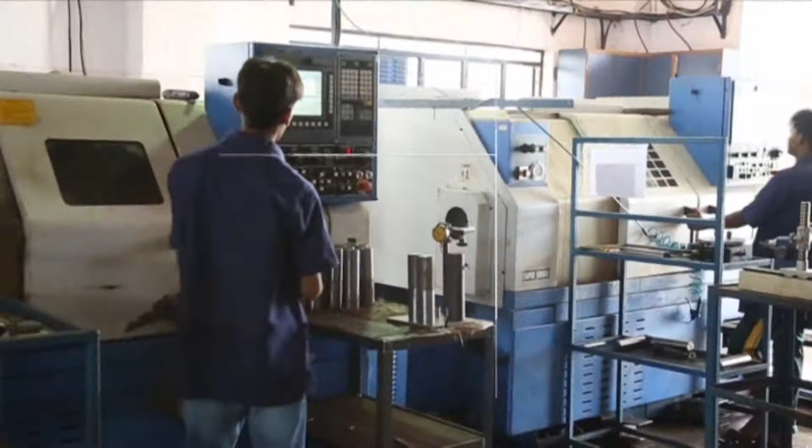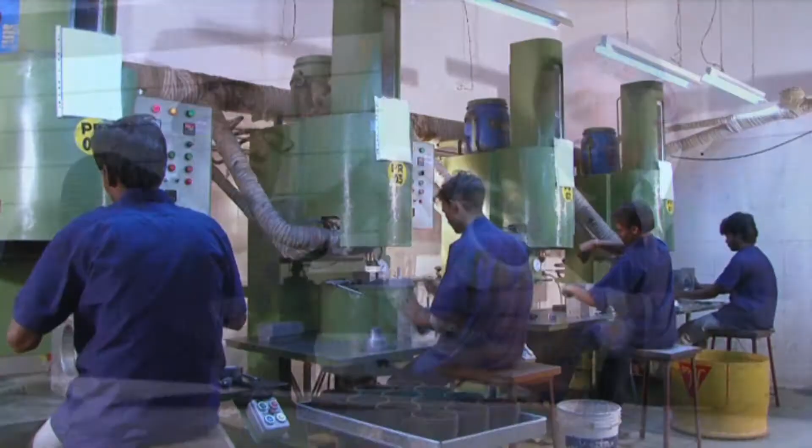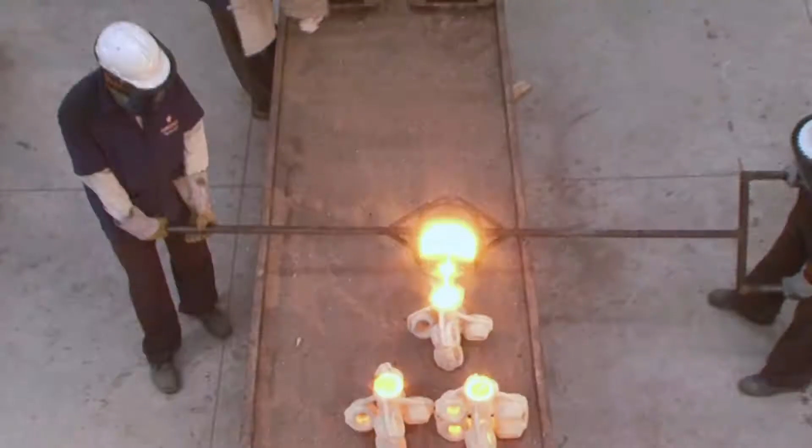The famous company, manufacturers of precision investment casting by lost wax process. Marshall Technocast is a state-of-the-art investment casting production house from India. Located at Rajkot, Gujarat, soon emerging as a vital center for investment casting, it has core advantages of expertise, experience and enthusiasm to deliver high-quality cast components to the thriving world of manufacturers.

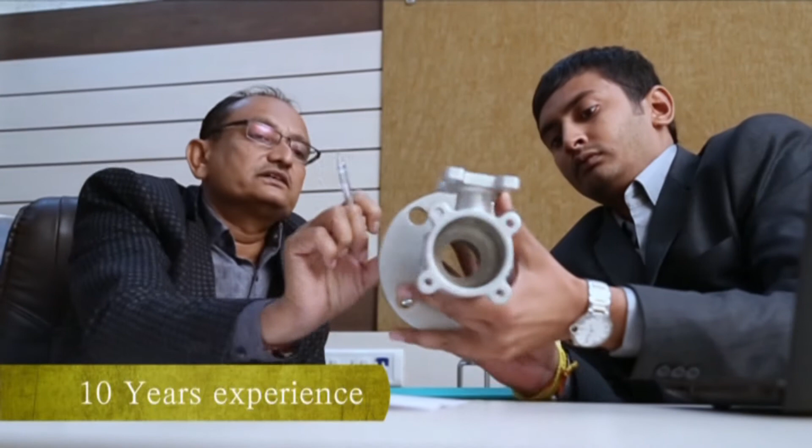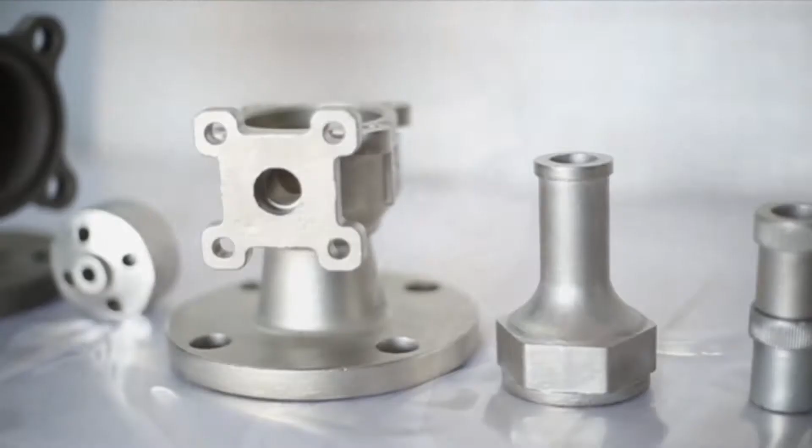So, let me introduce the whole procedure of the company.

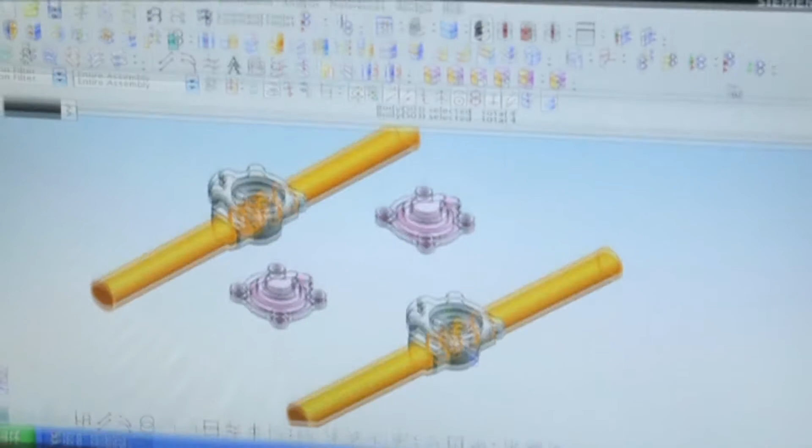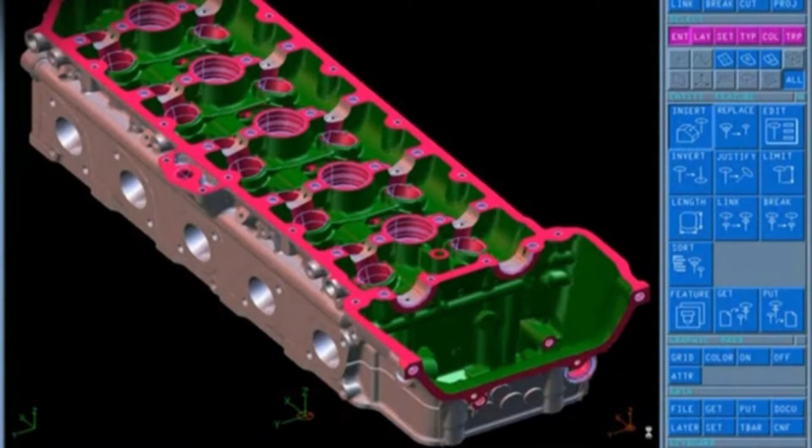Design and simulation. Designed to make it right the first time with collaborative engineering. MTPL helps customers in premature designing stages for building their products, using the concept of design for manufacturing to make it right the first time. MTPL offers in-house facility for 3D modeling and 2D CAD drawing using latest CAD software. We can also work with IGS, STEP, UG files from customers, supplied 3D models in various forms like Parasolid, IGES, STEP, UG files.

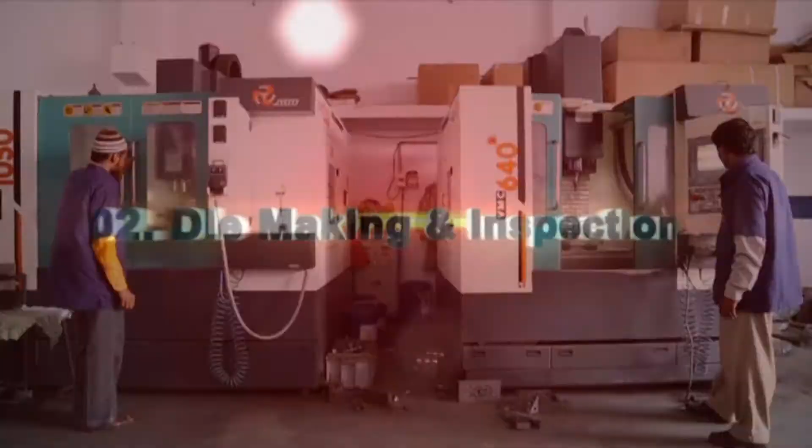Die making and inspection. We have all the facility and experience for die making on VMC, MC for any kind of critical components, and we are also doing 100% die dimension inspection as per drawing before sampling.

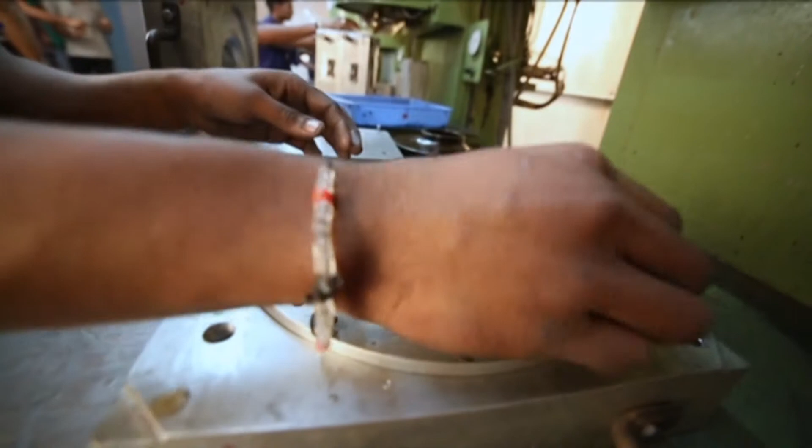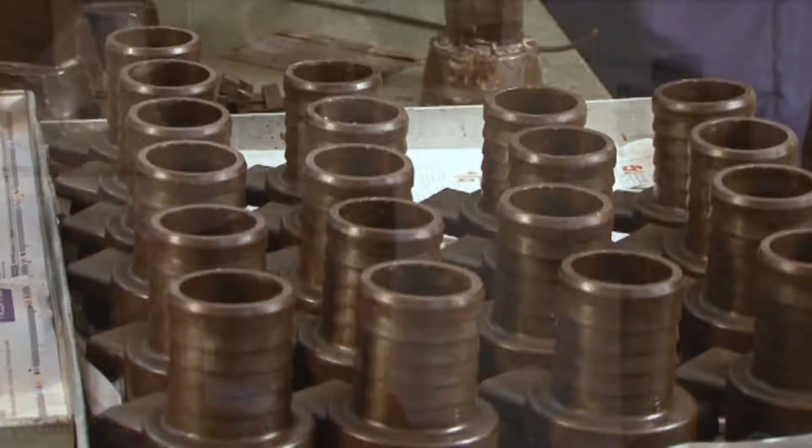Wax pattern injection and assembly. Final casting quality is a mirror of the wax pattern quality. We use imported pattern wax and soluble wax for accurate pattern making. Assembly design is done to produce best yield with best quality. We have 5 semi-automatic wax injection presses with vertical injection and runner bar extrusion press.

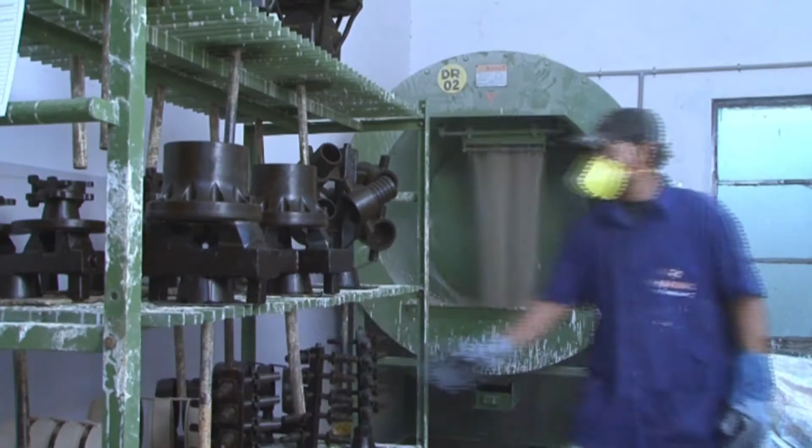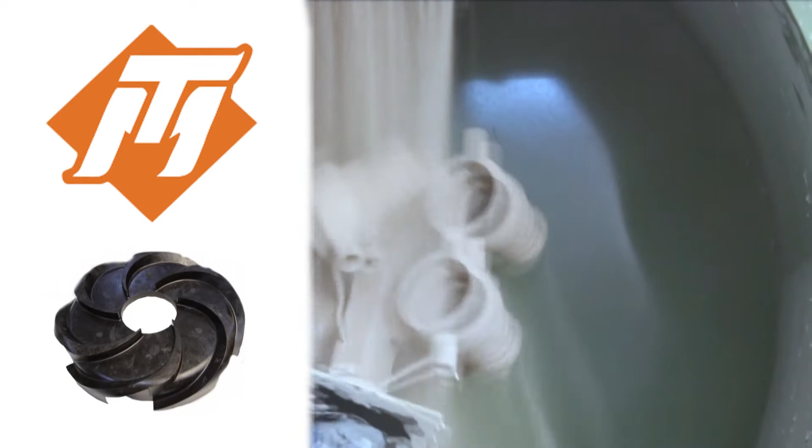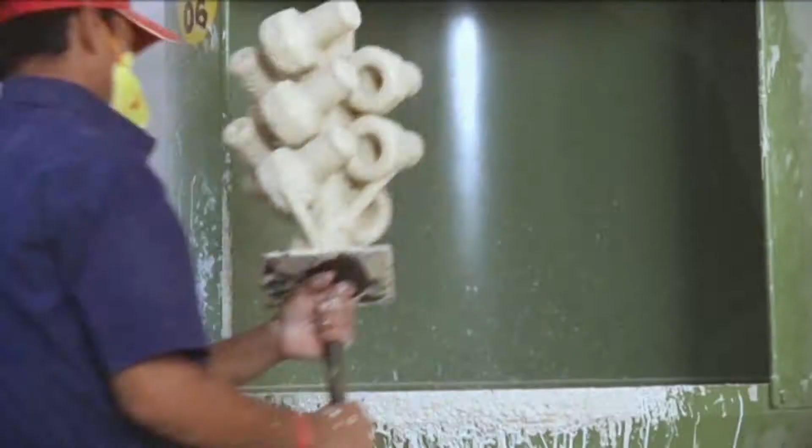Shelling. The wax assembly is coated with a ceramic shell by repeated dipping in ceramic slurries and alternating in dry beds of sand and clays. Heavy or thin sections are features of any part. Additional coating gives added strength to the shell, thus eliminating bulging or distortion of the casting. At this stage, the ceramic shell is heated under gas-operated dewax and the wax is removed by melting, leaving a hollow shell. The most crucial stage of the shelling process is the primary coating, where very fine grade of sand is used. This results in a casting with excellent reproduction detail and the designated surface finish.

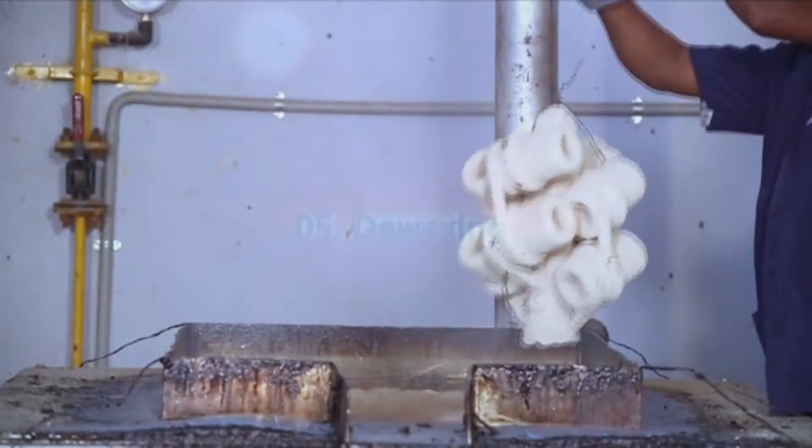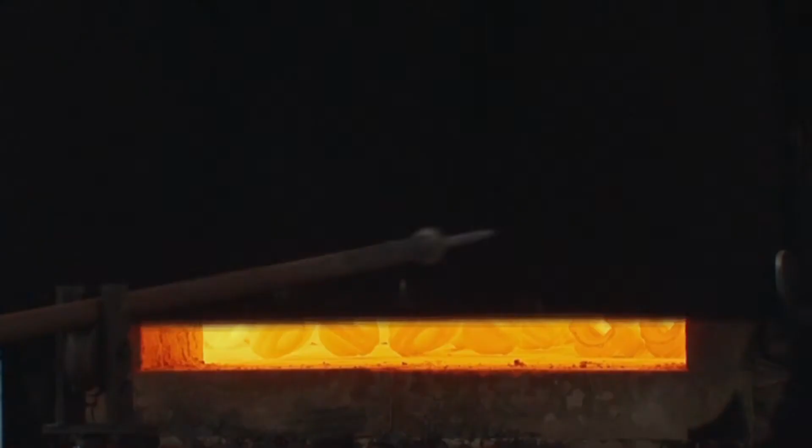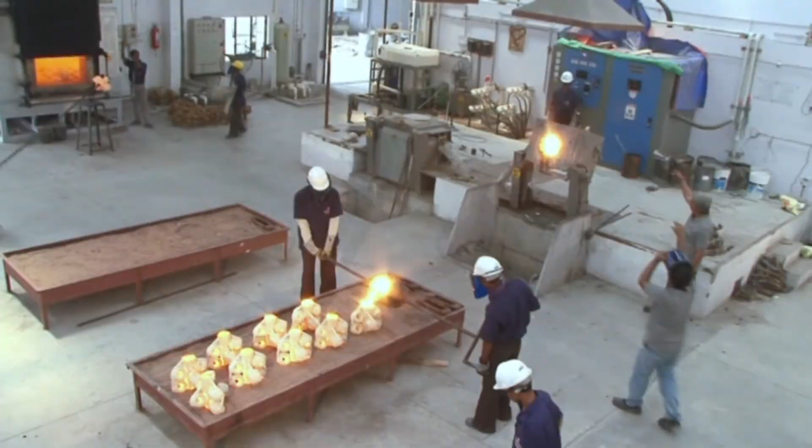Melting. The next process is the most important one. The melting process is the part which impresses the image of the investment casting product. The quality of the product depends on the melting process. That's why our melting shop is equipped with Inductotherm make induction furnace with 300 and 150 kg crucibles and temperature controlled shell baking furnace. We use standard and best quality scrap to ensure best metallurgical quality of investment casting products.

Abrasive cutting machines.

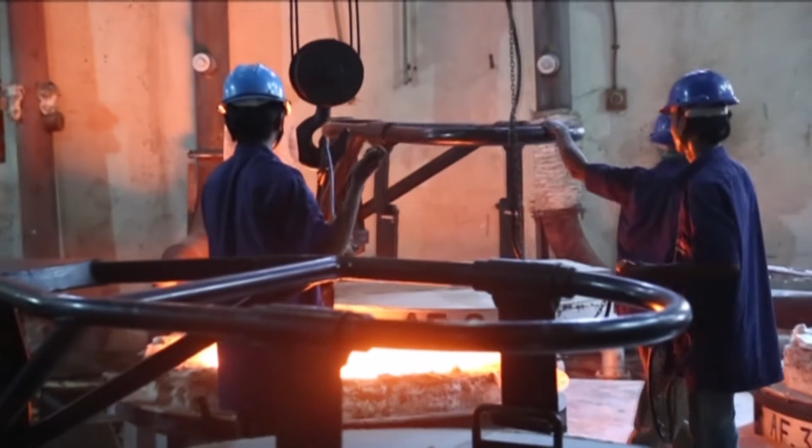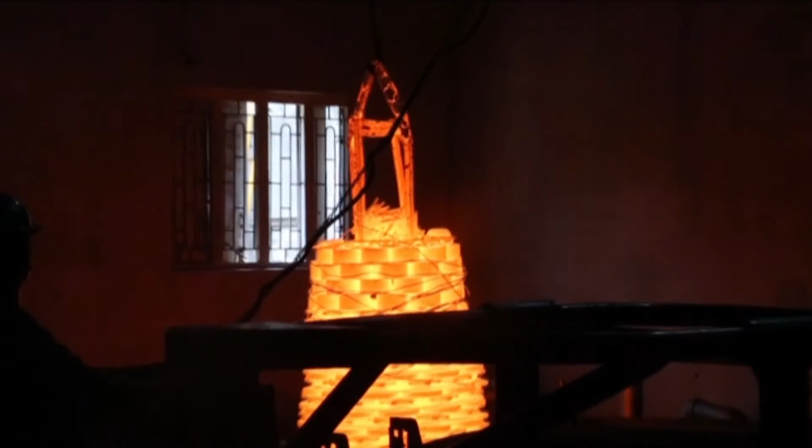Heat treatment to ensure desired material properties. We are doing heat treatment like solution annealing, normalizing, tempering with temperature controlled electric heat treatment furnace, along with special requirements of customers. Best heat treatment practices are ensured by the microstructure study after heat treatment.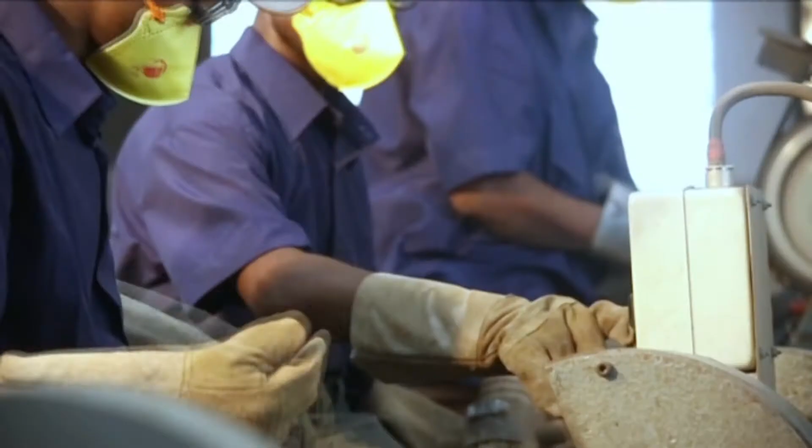Fettling. Our fettling shop is equipped with shot and sand blasting machines, belt grinders, and other machineries necessary for the fettling. We are also doing electroplating and other plating and coating as per requirements. We supply the casting without any gate and riser pads.

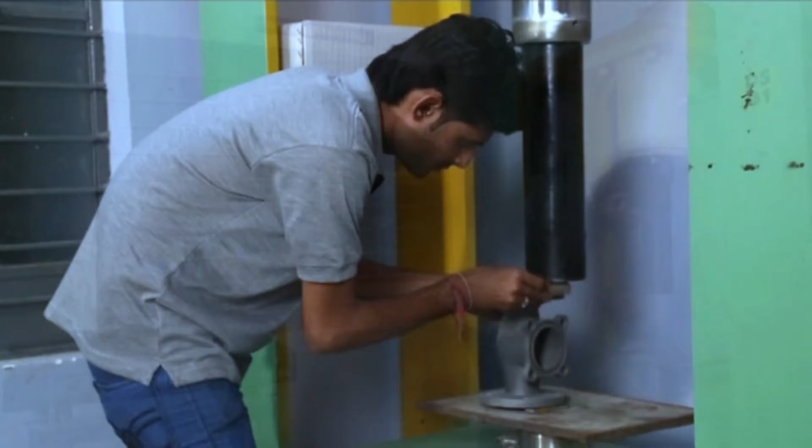Final inspection. All castings are subject to 100% visual inspection. All critical dimensions are 100% inspected before packing and final shipment. Packing. We always take care of finished product delivery.

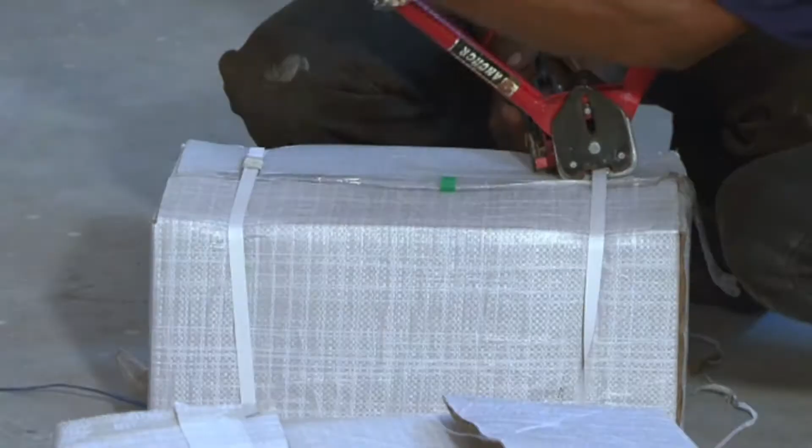We use standard seaworthy wooden pallets and corrugated boxes for domestic and export packing. So these were the steps of the lost wax process. Now let's take a view of our in-house facility.

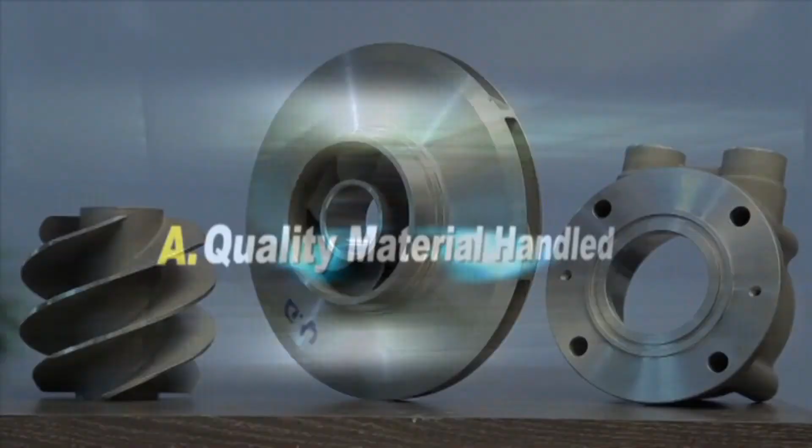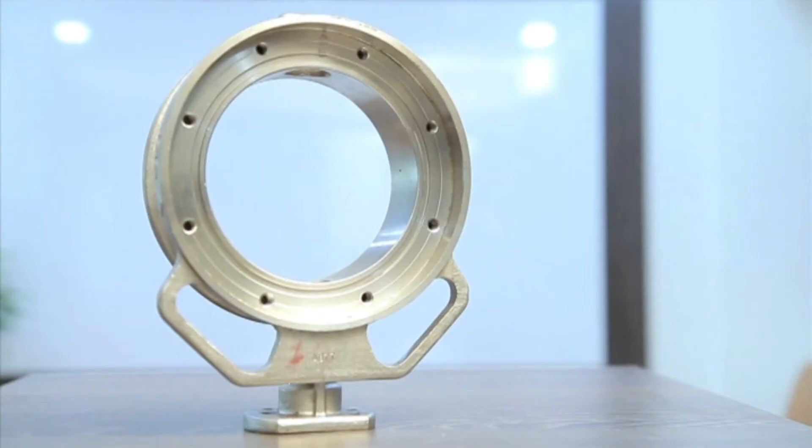Quality material handled. Committed to quality, we adopt a rigorous quality checking system to come up with the best products. Comparing to international standards and parameters, our products are high on all aspects including performance, durability, and utility. These include chemical testing, tensile testing, proof stress, impact testing, microstructure analysis, Brinell hardness test, and Rockwell hardness test.

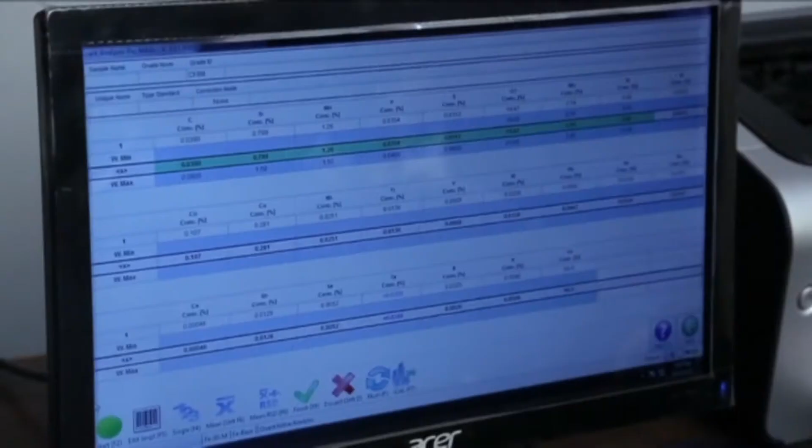Chemical testing is done using spectrometers, Spectromax X, made in Germany, which is well calibrated using setting up samples and certified reference materials. We have the ability to check 17 elements in our spectrometers.

Tensile testing and proof stress. Tensile testing with 0.2% and 1% proof stress is done using computerized universal testing machines with extensometer of 20-ton capacity, and the machines are well calibrated by NABL approved lab. A tensile test, also known as tension test, is probably the most fundamental type of mechanical test we perform on material.

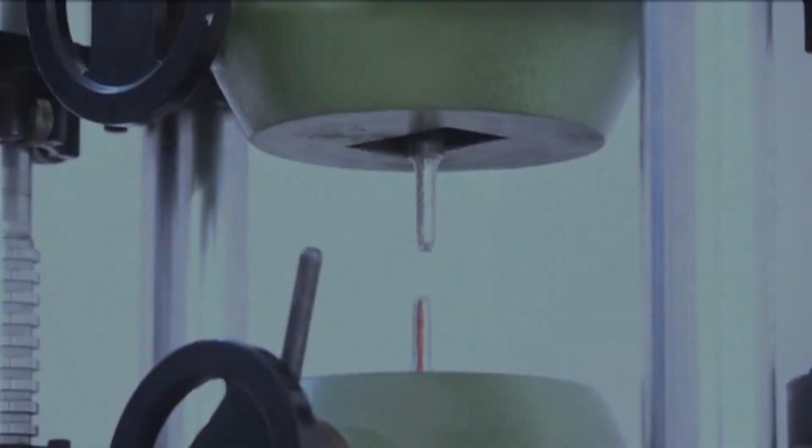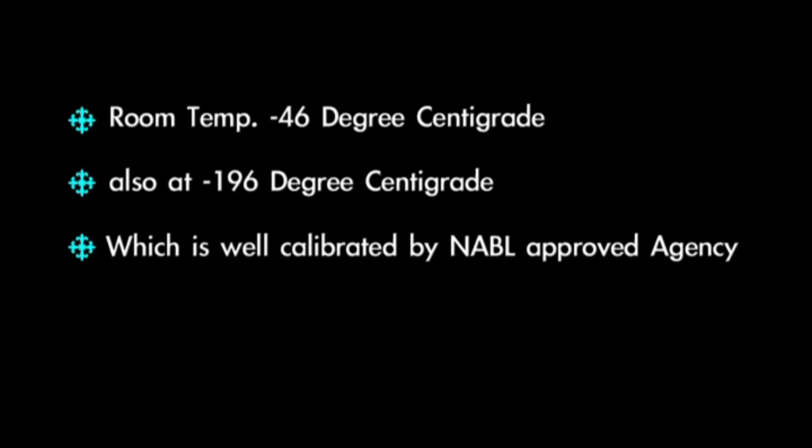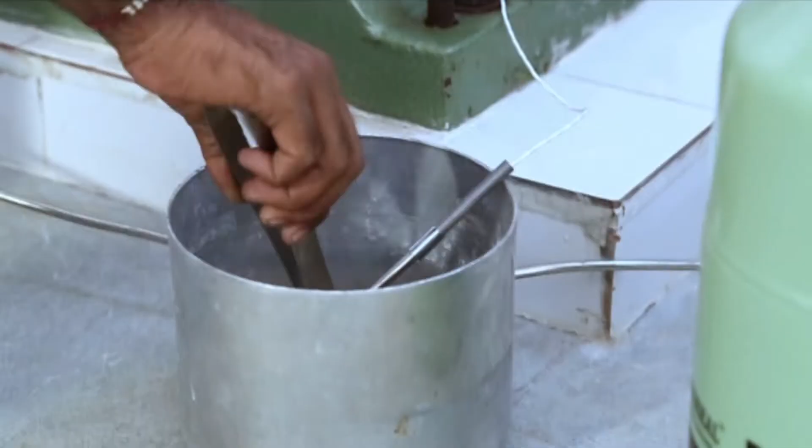Impact testing facility is available at room temperature, minus 46 degrees centigrade, and also at minus 196 degrees centigrade, which is well calibrated by a NABL approved agency and also complies with the requirements of ASTM E23. Impact value is measured in Joules. Impact testing tests an object's ability to resist high rate loading. It is a test determining the energy absorbed in fracturing a test piece at high velocity.

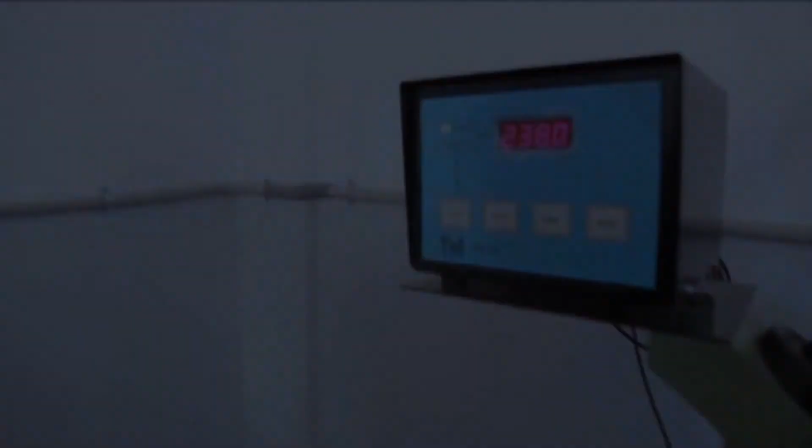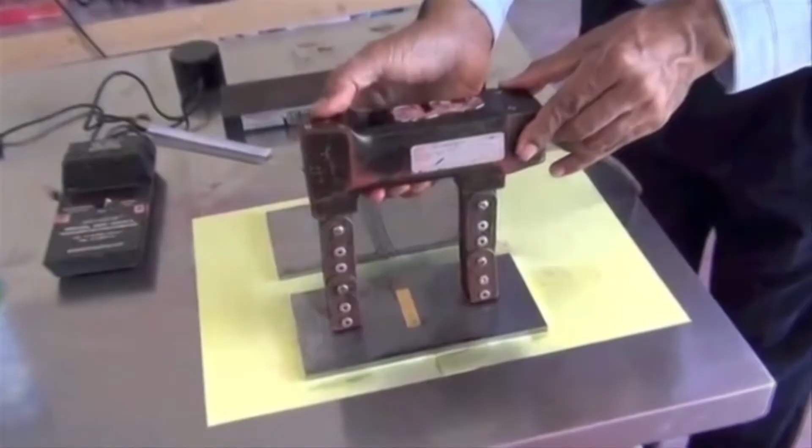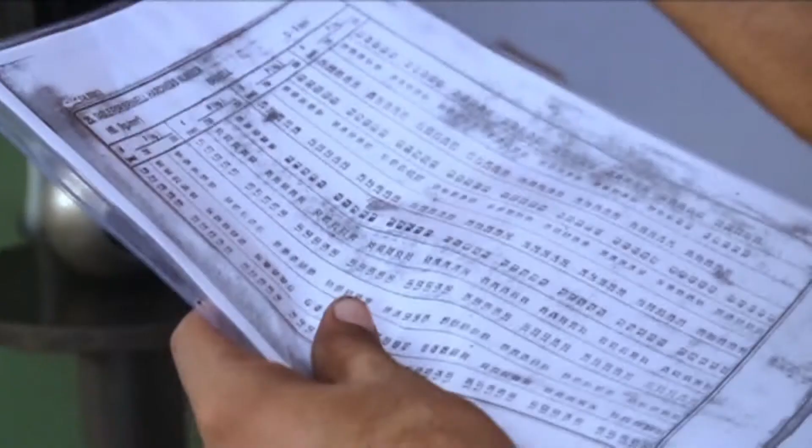Microstructure analysis and other related testing is done as per customer requirement. NDT testing: we can carry out in-house various non-destructive testing such as radiography testing, liquid penetrant test, and magnetic particle inspection. We also offer additional testing facilities like pressure testing, IGC testing, Brinell hardness test, and Rockwell hardness test. The oldest of the hardness test methods in common use today, the Brinell test, is frequently used to determine the hardness of castings that have a grain structure too coarse for Rockwell hardness testing.

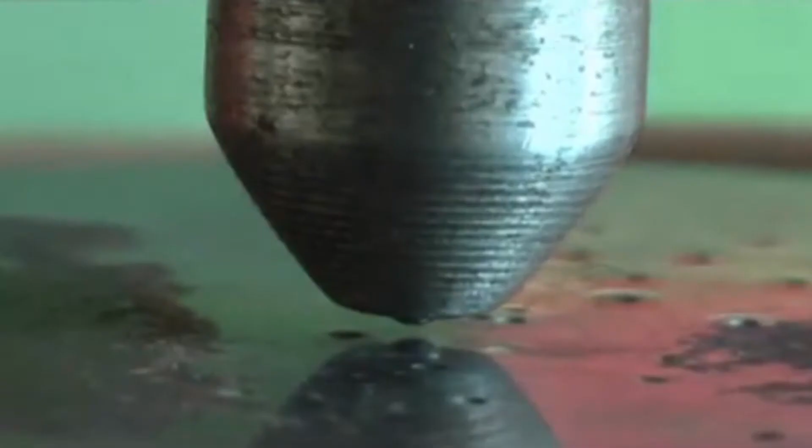Material handled: we produce any special metals as per customer specification or international standard specifications like IS, ASTM, AISI, SAE, DIN, EN, JIS. We provide investment casting solutions by the Lost Wax process, which makes Marshall the most admired brand across the world.

We focus on delivering solutions that work rather than just products. We develop manpower that grows in aptitude and work performance consistently. We make use of the latest technology in production and quality control. We stay market sensitive and adapt to the emerging changes in the markets.

The management plus the team plus the process equals quality. The company is awarded the below mentioned certifications for its efforts to maintain a total quality system: ISO 9001:2008 by TUV Nord.

AD 2000 Merkblatt W0 by TUV Nord. PED 97/23/EC by TUV Nord. Marshall Technocast Pvt Limited has created its own unique and leading identity in all sectors:

automobile, engineering, fitting, oil components, hardware, pumps and valves, aerospace casting, and firefighting components. So we are always there where quality is needed.

Our markets: the company is confident of serving Indian as well as international customers. Our production capacities empower us to cater to any requirement in investment casting. The company is in the process of building a good customer base all over India.

The marketing department is also in touch with a number of prospective buyers in Germany, Italy, Spain, Portugal, France, Belgium, Sweden, UK, Canada, USA, Russia, China, and Australia.

To our customers all over the world, I am sure you too are working for better living. We are with you in your mission. We will make all efforts to deliver better than others with each passing day.

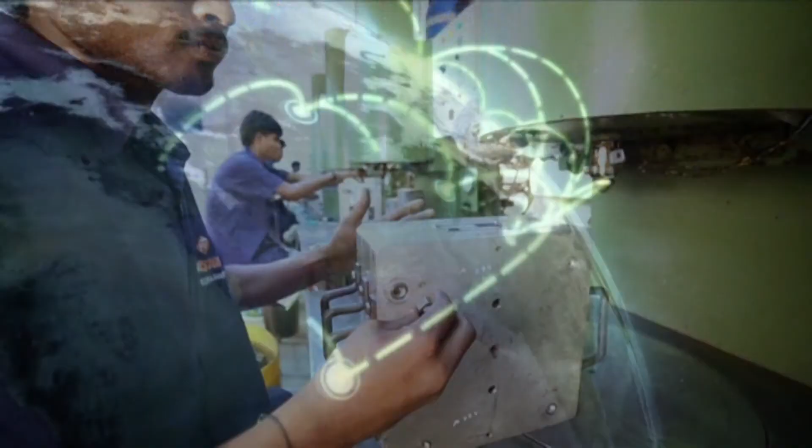The company is sure to have a very strong marketing base within a short period of time. We are sure that our company will satisfy our customers with great quality and great service. Our quality is our introduction. Your faith is our valuation.